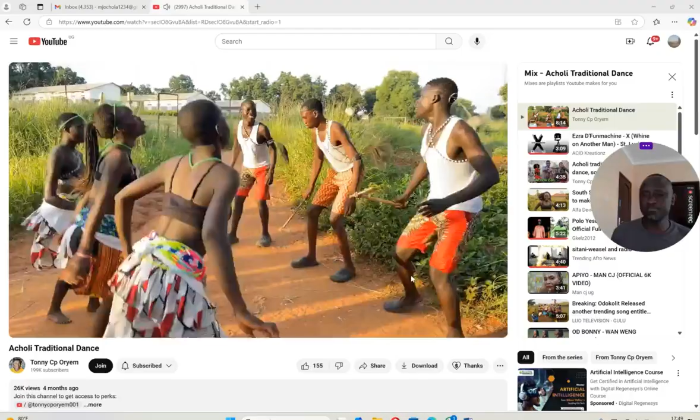Okay, that was anyway, culture is culture.

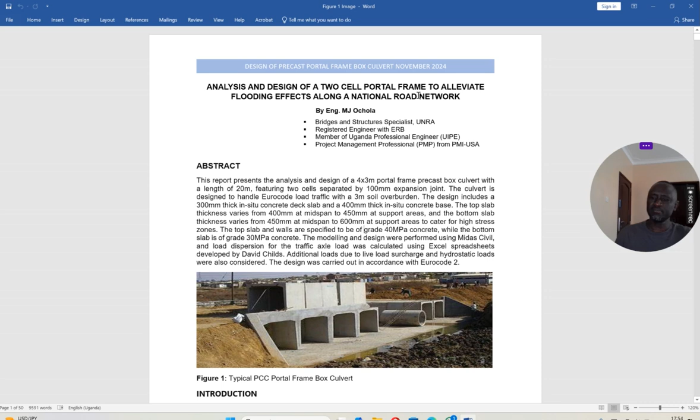You see at the bottom of the vertical walls, the forces are higher, and therefore they require a thicker base to absorb that punching shear, the shear stresses, and other things. So that's why you see this variation.

Now you'll see in the model, the top slab and the walls are specified to be grade 40, while the bottom slab is grade 30. It's cast in situ concrete.

The modeling and design were performed using Midas Civil, and load dispersion for the traffic load is also calculated using Excel spreadsheets developed by David Childs. Many of you who have access to most of this Excel know we have one prominent professor, David Childs, who develops quite a number of those spreadsheets that we always use to help us with design.

Additional loads due to live loads, surcharge, and hydrostatic loads were also developed. As you are aware, gentlemen and ladies, for culverts, it's a very simple loading that you need to understand.

Culvert with cushion or with overburden soil, you have two cases to consider. You have a case when the soil is dry, meaning you calculate the overburden stress, the vertical stress on the culvert, based on dry density. Then you work on the lateral pressure, soil pressure on the walls, based on the dry density. After that, you do the surcharge and hydrostatic separately.

Okay, hydrostatic comes in now. When we're dealing with hydrostatic, that's when the moist or saturated situation comes in, meaning you now have case 2. In case 2, the overburden soil now has a saturated density, and the density for the lateral soil pressure will also have the saturated density. So you need the two densities so you can compare and look at the worst case scenario, and also the issue of hydrostatic pressure comes in.

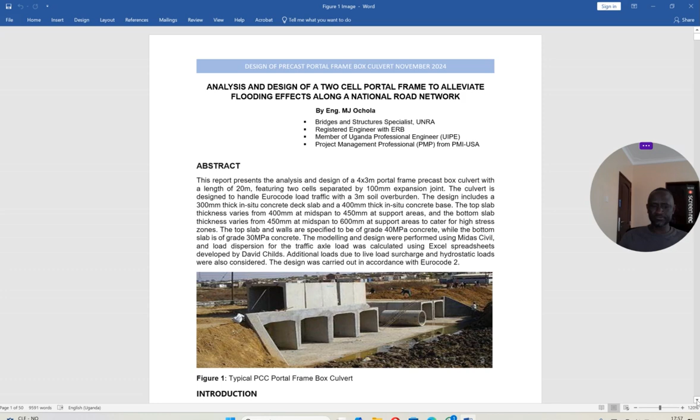So this is an internet portal frame that I put in here, but I'm going to modify this — I'll do an AutoCAD drawing and other things to beautify it more, and then compare the effect of when the fill is 0.5 meter versus when the fill is 3 meters. For now, we are dealing with 3 meter depth, but when I deal with a fill of 0.5, I will try to do a bit of adjustment, though more or less similar stuff.

The introduction here — basically, we are all aware box culverts are essential structures in civil engineering. They are used to channel water under roads, under railways, and other embankments, and in low-lying areas where we don't have proper channelized water. Where you have proper channels with well-defined river banks, it's difficult to use boxes, because that's where we begin to look at scour depth and turbulent flow, which becomes significant. Box culverts and other culverts basically deal with water that is more still, stagnant, and can flood from any direction, so they act as relieving structures.

So basically you find they are used in most swampy areas, low-lying areas, and the rest, but not well-defined rivers with turbulent flow, which require a bit more in-depth assessment.

This report details the design of a precast box culvert, considering structural requirements, material specification, and load impact. Whether it's precast depends on the contractor or the designer, and also the agency of implementation is very important.

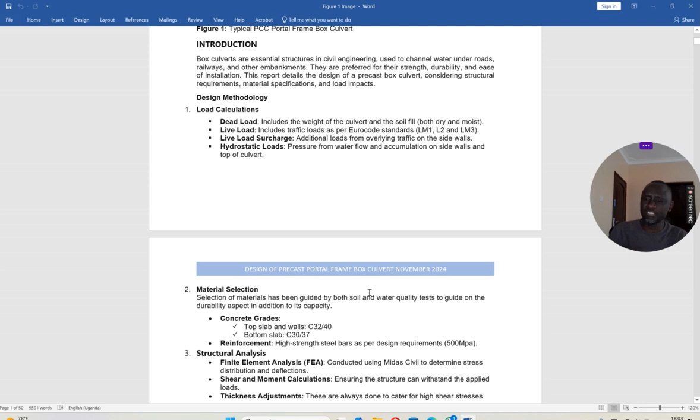Then the live load surcharge comes from traffic overlying on the side walls. Then hydrostatic loads, which are pressure from water flow and accumulation on the side walls and top of the culvert. That's why you have to look at two conditions: dry condition and saturated condition. Please don't forget this—it's very important when designing box culverts.

The rest is okay. Materials here—we already talked about material, concrete and reinforcement with all their grades given. So you have a class 40, then class 30. This is cylinder 32 and cube 40, cylinder 30 and cube 37. These are indicative; when you do mix design, you'll be able to get that. Reinforcement uses 500 MPa.

Then modeling—finite element analysis conducted using Midas software to determine stress distribution and deflection, shear and moment calculation, ensuring the structure can withstand applied loads. So basically, the output of your modeling and loading analysis gives you the shear forces, moment, axial loads, and other stresses. You're able to get that.

Now it's these outputs that you translate into the next stage of design. If you have to now use a tailor-made code of practice and other things, you can proceed, because you know the moment, you know the shear, you're able to get the shear reinforcement and the amount of reinforcement needed.

You first try, you do the required, you get to know the required area, then maybe it's not passing some of the limits or requirements, then you improve until you get the area that meets all the requirements. So at the analysis stage you get the value, which is then taken into the design stage. Since you're using Midas, there's another stage where you do the design, so we shall see how that is done.

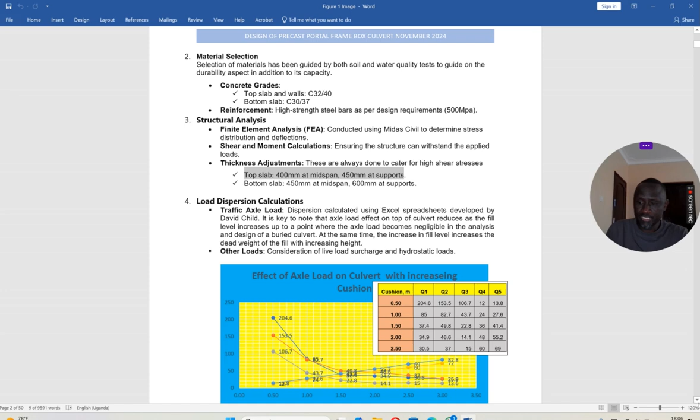Now the load dispersion calculation - here we have used David Child because it's now exceeding 1 meter. When you look at this table, I shared this before, you will find that this higher value here, the 204, the 153, the 106, coming down - these three are actually telling you that at the depth of 0.5, you have a very high value of dispersion force or pressure on top of the slab.

Then at 1 meter, it's dropping. As you go to 1.5, it's dropping further, up to about 3. At 3, it has actually dropped to only 26 from 200. So you see now there's a point where the traffic load becomes negligible.

But at the same time, if you see this rising member here, this is now the effect of the dead load. So as you increase the thickness of soil, you are increasing the dead weight and the effect. So the moment, the shear, soil pressure - everything starts increasing with the increase in

the overburden size. So at 0.5, you go to 1 meter, it's increasing, but the effect of the wheel load is also reducing at the same time. So there's a point where you find you don't need to consider traffic load in your design of box culvert once a certain depth of fill has been reached. So this is a very good table.

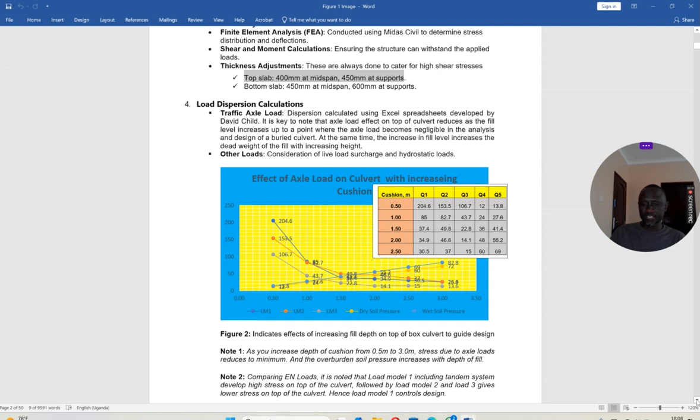Figure 2 indicates the effects of increasing fill depth on top of box culvert to guide the design. Note 1: as you increase the depth of cushion from 0.5 to 3 meters, stress due to axle load reduces to minimum, and the overburden soil pressure increases with depth of fill to maximum. So basically, you need to be aware of that.

So if you have a pipe culvert near your area and you find someone is trying to just cover the culvert temporarily so that people can cross, then resume work tomorrow - it's a very risky approach. By the time the road work is done, that is why sometimes at commissioning we find culverts have cracked, because you have exposed your culvert to traffic during construction in the name of allowing for diversion or quick access or crossing by the public, not knowing that when you have less fill, the weight of the truck goes directly onto your culvert, and if the culvert is not protected with concrete surround, definitely you're going to have a problem.

So sometimes you can see some contractors do a concrete surround. They will tell you, for us all this is okay, we are going to cut - you don't know why, because concrete is very good in compression. So when you do that, and you have a 0.3 to 0.5 fill, just temporary to allow traffic overnight or to resume work tomorrow, whatever truck is crossing your culvert will not damage it. But for some of us who just do the fill using soil and continue without inspecting, the culvert is already cracked.

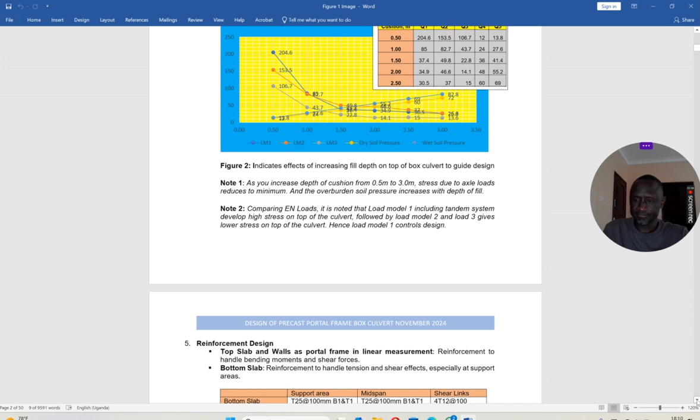Normally you say I'm using SV196, etc. Please try to check all and make sure even load model 1 is done, load model 2 is done, so that you are able to get the worst case scenario for your design.

Reinforcement design - this came from our analysis. We're not going to dwell too much on this. Top slab and walls act as a portal frame in linear measurement, with reinforcement to handle bending moments and shear force. This is the traditional way - we know concrete is weak in tension, so reinforcement is brought in to take on the stresses resulting from applied loads, the fill, and then the traffic.

So that is what you have here - the bottom slab, the top slab, the portal frame, the wall and the top slab, giving you the support area, the mid-span area, and then the shear links.

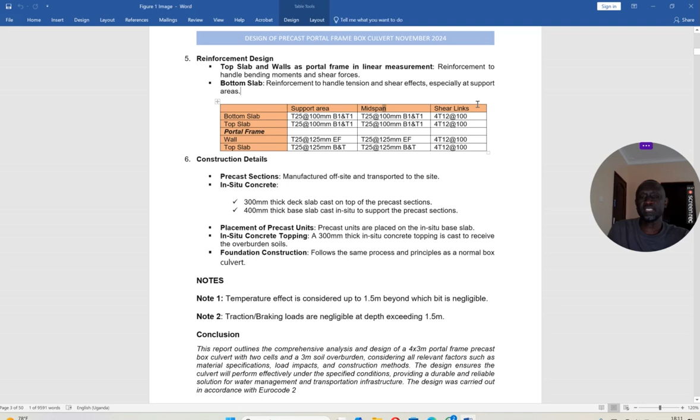Very interesting shear link - I want you guys to read a bit about shear links in the slabs and the rest. It's quite interesting, and we always struggle with young engineers on how you detail it. Look at the detailing pattern and try to see locally. You will go to the internet - I'm going to share more, not now - and you'll see there's a way you look at it, and what is the length where your shear links are required.

And then in between, what is required for normal sections. These shear links work everywhere - in slabs, in foundations, in big walls, and the rest of it. So it's always good to check.

For construction now, I may not waste too much time - I've already explained where you do your foundation. You prefabricate the portal frame in your yard, where you've prepared everything for steel formwork to give you a very good quality portal frame. Your precast sections are manufactured off-site and transported with a low bed, properly protected to avoid excessive vibrations that could create cracks. We don't need crack initiation at construction stage - cracks will only come from loading, which we normally take care of during design.

So these are the sizes. Then placement of the precast unit - they are placed on the in-situ base, so you must precisely and correctly construct your in-situ foundation to the required fall or grade. Be mindful that you have inlet and outlet - the inlet normally tends to be slightly higher. If it is 0, then we have a negative fall, maybe 20 millimeters down at the exit point or something, but it will be determined by the manuals for drainage and falls that are given.

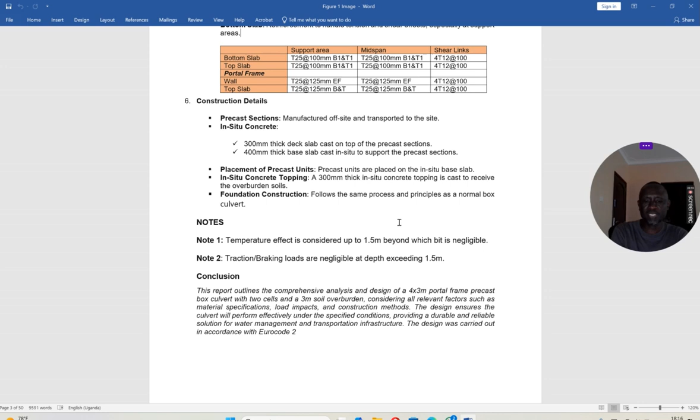In conclusion, this report outlines the comprehensive analysis and design of a 4x3 portal frame precast box culvert with 2 cells and a 3 meter soil overburden. Mark the keyword: portal frame, precast box culvert. A box culvert is a box culvert, but this time it's a portal frame, U-type, and precast. Think about prefabrication: the yard where fabrication happens, the steel mold, the processes required, and even the grade of concrete for prefabricated stuff tends to differ. Even the lifting effect may need additional reinforcement to take care of lifting, supposing there's an impact somewhere. So mark this: portal frame precast, 2 cells with a separation, and an overburden of 3 meters. Considering all relevant factors such as material specification, load impacts, and construction methods, the design ensures the culvert will perform effectively under the specified conditions, providing a durable and reliable solution for water management and transportation infrastructure. The design was carried out in accordance with Euro codes.

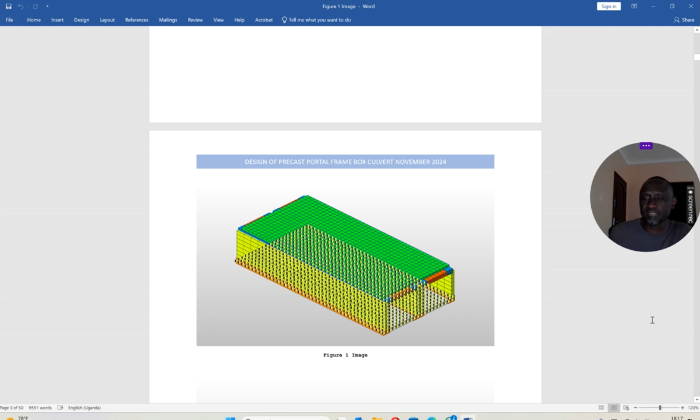Now we would have tapered this, but Midas does not design tapering sections. We raised that issue. I hope they will handle that.

This red part, this top, this green part here is now the in situ, but this one here is the portal frame. So this portal frame is 4 meters here and 3 meters here. This is a gap of 100. This will be filled up with some filling stuff that the contractor will consider, and then you load this structure, filling it up by around 3 meters.

You have effect on the sides. So there should be some shear keys, especially for these members, to avoid this. Remember, if you calculate the shear here, it can actually push this thing down. So this has to be rigid, this area has to be rigid, and this frame must be rigid from top to bottom to avoid being pushed by lateral soil pressure. How do you achieve that resistance? By introducing shear keys at the bottom. That should be able to help.

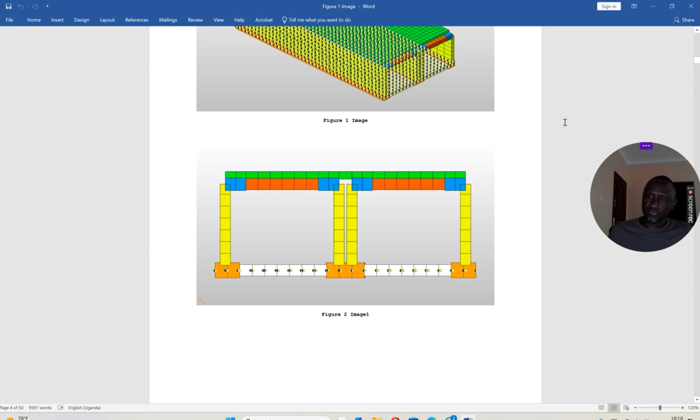So that is that, and this is a line diagram of the two portal frames, giving you two cells and the bottom in situ slab, simulating the soil pressure with the spring constant.

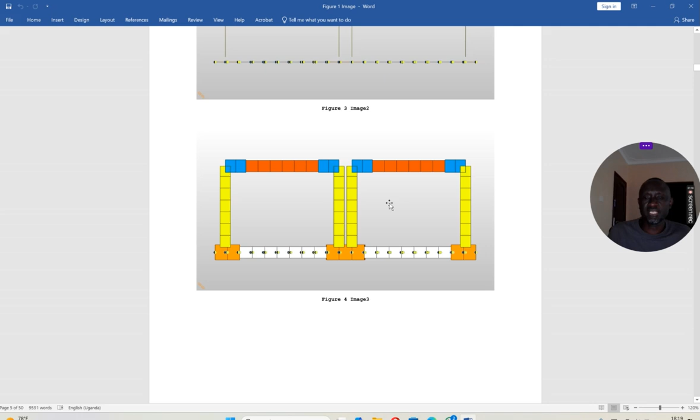And then here is the same model, but this one doesn't have any top slab, a 3D view. This is what we have, because the construction process is: you do this bottom slab, then you place this one, and later on you do this last one here, and then you will be done. Then the wing wall comes later. These are typical sections that we did.

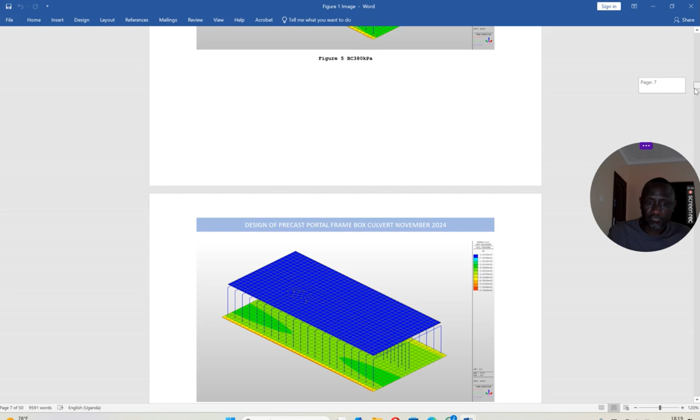This is now the model, the analytical model for plates, the bottom slab, the top, and then you have your normal portal frame, which I think somewhere you're going to see. You can see here, this is this one here, the normal portal frame. If you try to look, if you consider the opening as plates, then this will be deactivated kind of.

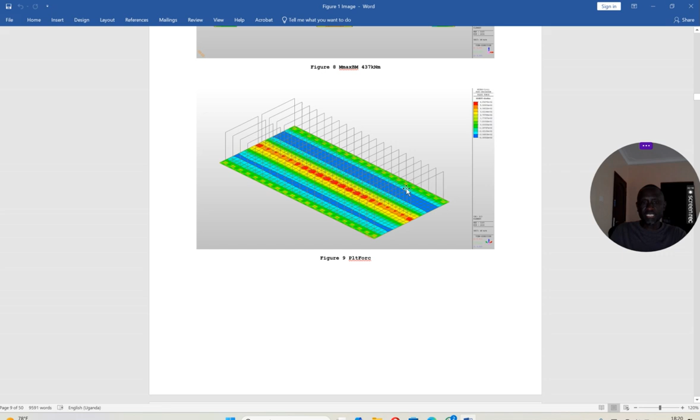You see like a line, because these are beams. So when you go and view the model as beam, you're able to see this, but you're not. This one goes into a bit which is not very clear, because it gets deactivated while the other is activated. So this is the model, and this is the output.

This is the shear, and this is the moment. You can see that all these moments are for 1 meter. If it was a normal plate where we have the walls all the way, you just have to cut a section to be able to see it. But now you can see this is the frame.

So the plate, which is the bottom, becomes deactivated kind of. You can see the pattern, and then this is a 2D view. You can see that where you have the portal frame resting on the in situ base slab, it is a pin support.

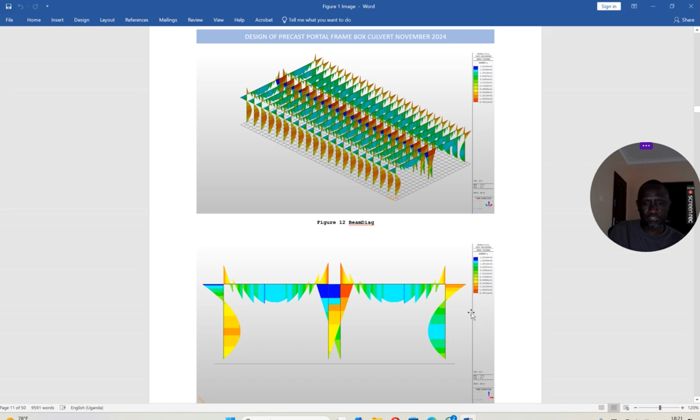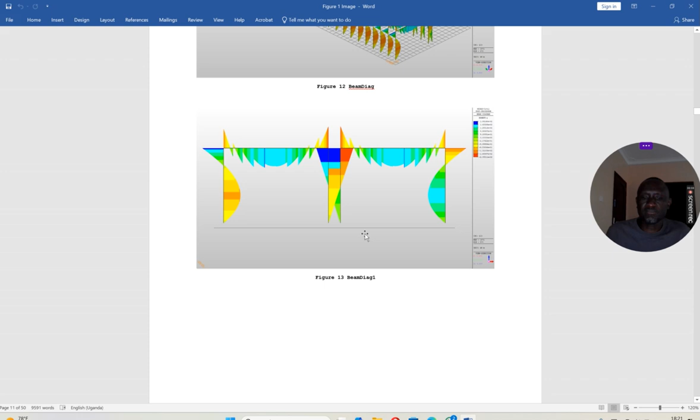You have to be careful when you are modeling this. You go to the beam releases. From the beam releases, you are able to set this aspect of pin support, pin to fix, and fix to pin. All these are fixed except this one, which is pin, and the rest will be fixed. Once you do that, you will not go wrong. It will give you that pattern the way you are seeing it, and you are good to go.

So this is shear, and this is axial load. This is now the axial load in 3D, and this is now the boundary condition. This boundary condition is what you need. At the bottom here, this is where you are giving this support so that it does not take up moment. That's where you have to go.

These are frames, these are portal frames, by the way, 1 meter. If you model it as walls, there's normally a bit of difficulty in putting in that frame and the boundary condition. But if you do it as a portal frame, you are good to go. You will have it well.

So now these are the rigid links up here, which connect things. We could have done this one as elastic. You can use an elastic link, but there it has to be defined as rigid, and it will still give you something similar to using rigid links. Down here, these are the support system, support condition, where you are connecting it, and also giving the definition that this last point is a pin point.

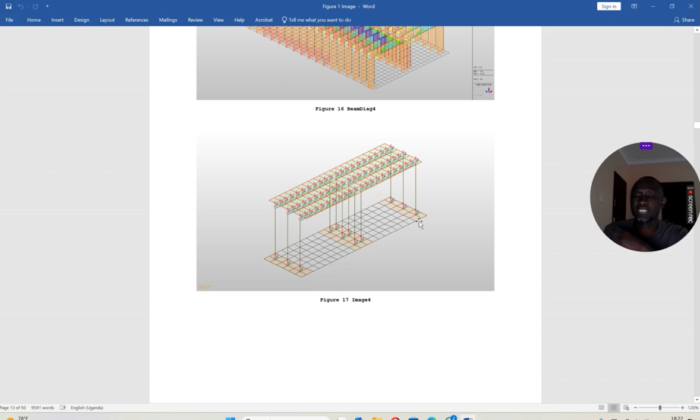What we have to do is connect the pin point together with the slab, so that it communicates and the loads are transferred, as you will see below. Yeah, so basically that is what we have.

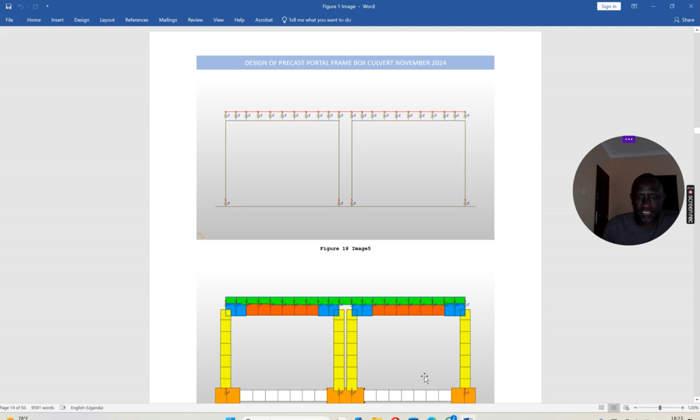So here is the thing. Here is your slab, the bottom slab. These are the elastic links, which are rigid links, connecting the in situ slab to the top here, so that there is a transfer of load in accordance with the way it acts in reality. Down here also you have the support, the links, but the last point has to be defined as pin. So this pin end, and then the next joint will be rigid, and that's how you see it down here in the 2D impression.

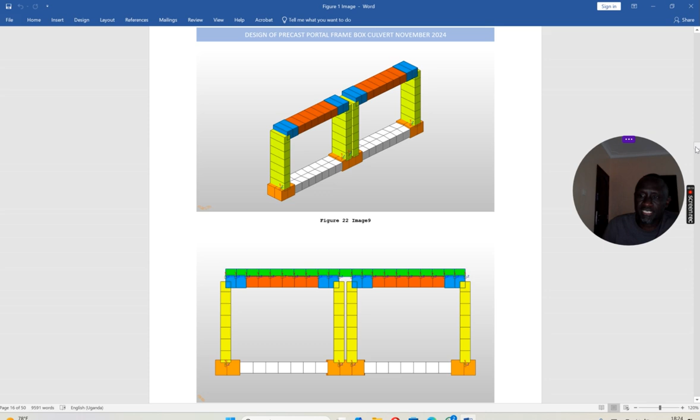So basically that is what you look at. What I forgot to do was to demonstrate the different loading, which I think I will do for the other one. So this is the 3D, this is now the portal frame as laid out. This one is one member made already. I've done this and used the average, because if you do tapering and indicate it here, it cannot design for you. I told you that Midas will design a basically rectangular member, not a tapering one.

So ladies and gentlemen, this is your modeling up to the last point. I've gone slightly down, but the outputs are here. These are the outputs. So from this output, once you are done with all this modeling, I told you that in Midas there is a component for design. You go to the design component, and you are able to do your specifications, the design code, the material grade, the limits, the stresses, crack width — all that you have to specify.

Once you have done all that, then you are able to run. But there are also procedures which I think we shall get time to demonstrate. In my previous session, I think there's somewhere we did something on design of box culvert, so it's not very far. Once you model it and give the right boundary conditions, it should not be a problem.

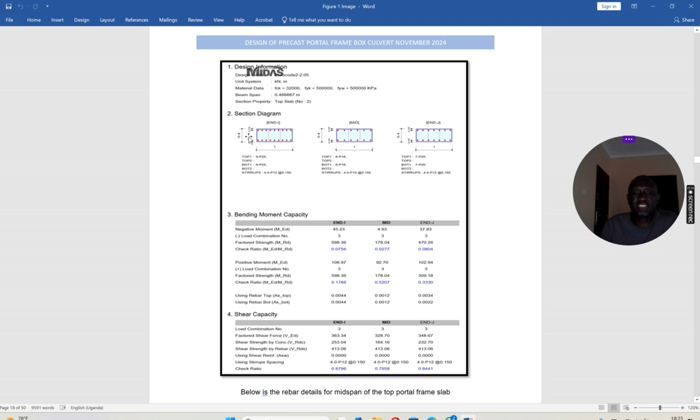So when you do your design, this is what comes out. You find these are the top portal frames. You see this one is near the support. I want you to take note: this one you see more reinforcement here, and less here, at mid-span. So that means the moment tends to be more at the support than at the mid-span.

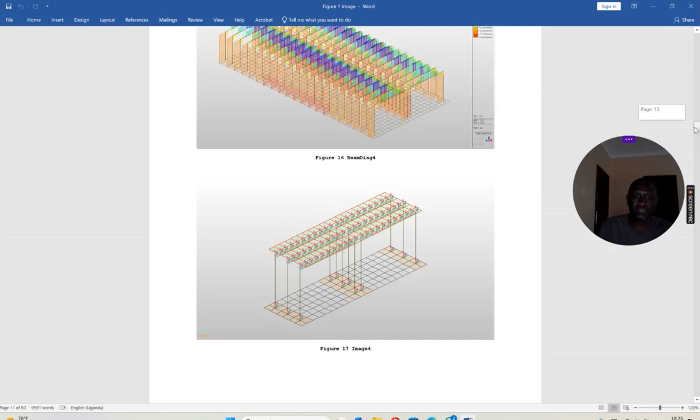I'm taking you back here. So if you look at this, the moment here tends to be less than the moment over the support. The rate value seems to be high, that's what I'm trying to say, that it tends to give you less. Then shear tends to be higher here, but reduces to zero at mid-span and increases again. So the shear links may not go all the way there. This distance you need to know so you're able to specify that.

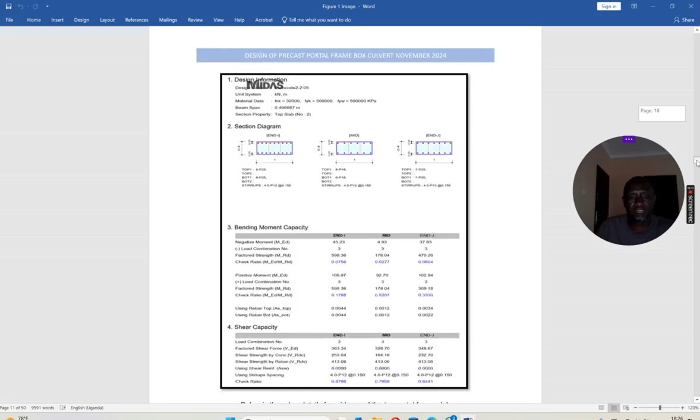Okay, so basically in the design report, this is what gives you all the details of the reinforcement you need. They're all captured here. At your free time, you can actually do that, try to view it, and appreciate it.

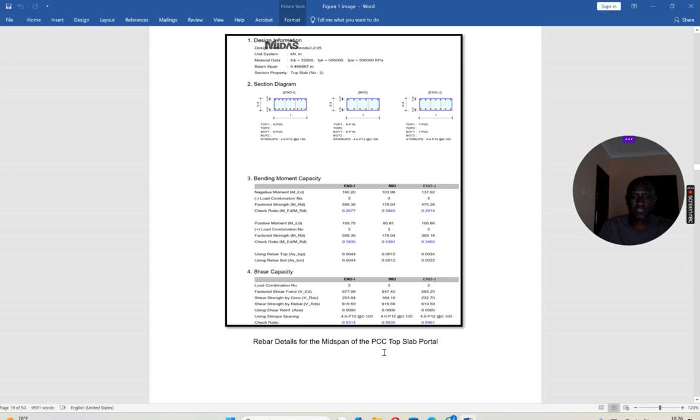Then these are all. Then there is for the vertical wall, then there is for the top slab, this is for the top slab portal frame, and then you're going to have for the bottom slab. And then you see this is like a column, so you can see the PM interaction diagram comes in. So you have a design, applied load, axial forces and moment resistance checks.

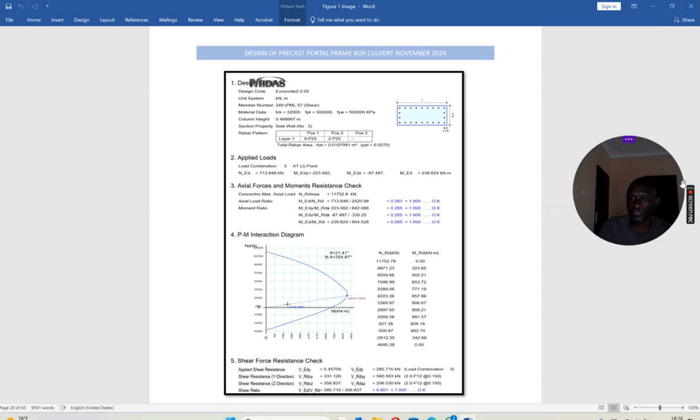So they go and look at the worst case, and the shear force resistance checks are also done here. All have passed. Now here, when you're modeling, you can remove these two middle bars, very easy to model, to remove it. We shall demonstrate sometime back and you get it.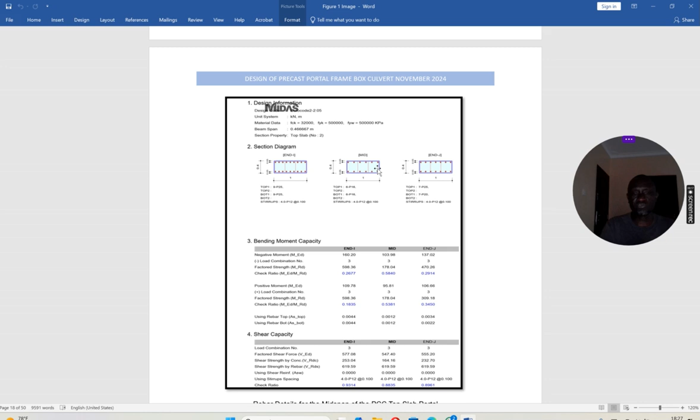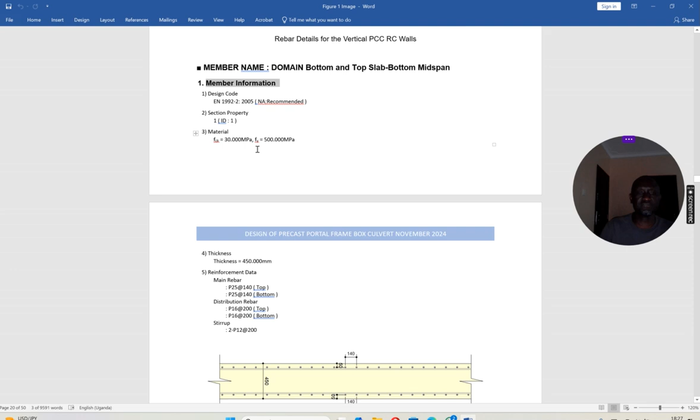Then when it came to this, this was for the summary. Normally for Midas, you can look at the summary to avoid going into detail output. There's detail output, then there is summary graphic. So here is graphic, I just decided to give you graphics for that. But now for the slab and the rest, they were giving detail, so with the detail member it gives you the domain, bottom and top slab, bottom mid-span, giving the member information, the Euro code, everything.

Then you come down to the reinforcement that has been input to design. The thickness is given, reinforcement data given, distribution bars given, stirrups also given. So you find it gives you everything, the spacing given here, the cover as you have specified, because you have to specify all the cover, everything.

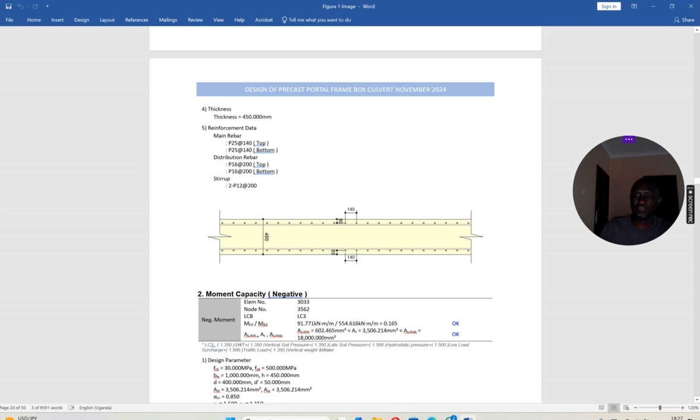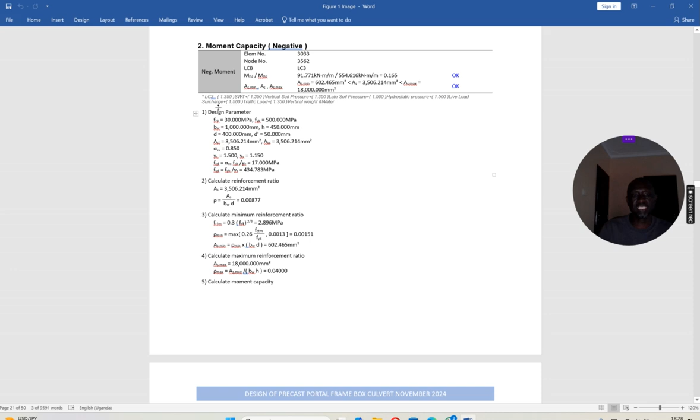So that gives you, and then now you start with moment checks, moment capacity check at the negative, this is now the one at the support. It gives you all the parameters, the design parameters all given here, and it tells you that actually your design, basing on the reinforcement you have specified, is okay. Then moment capacity for positive bending moment is also here, you look at it, it gives you the same thing, it has passed. So that means the reinforcement you have specified is okay.

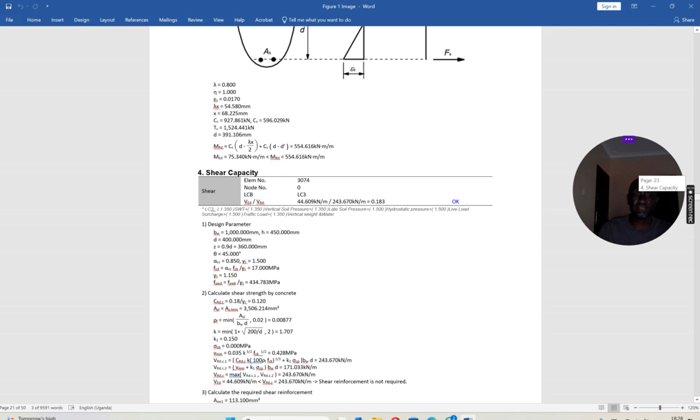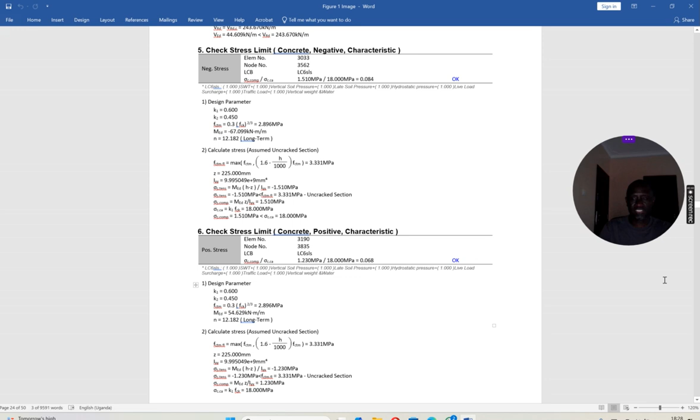You come down and check the shear capacity, you have to check and make sure it's okay. Even the stress, checking the stress limit, concrete, negative characteristics and the rest of it, it has to check for you the crack and the stress limit, and if there's any problem, then you are able to go back and modify. Even checking on crack limit, they're all given. So if it has all passed, that means you're able.

Look at the ratio. If the ratio is quite low, less than 0.5, that means maybe you can still adjust the reinforcement so that you can slide it up to around 0.75, because again if you go too low, it means you have over-designed.

So we have to strike a balance for value engineering and see how best we can handle that. This explains many things that happened there.

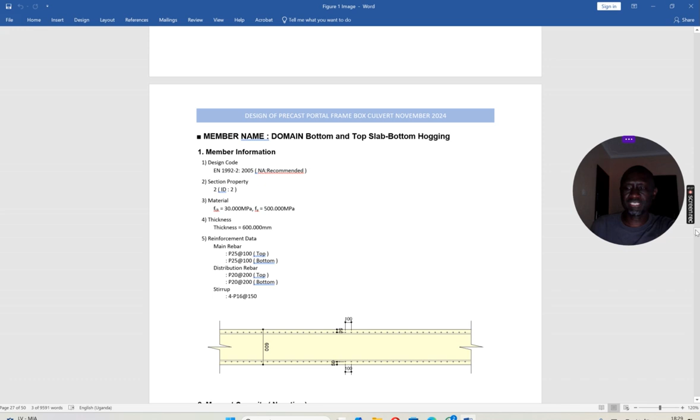You see now, this is the second one. The member name is domain, bottom and top slab, bottom hogging. It will explain for you and give you all the details. They are similar. You get this one, this is the bottom detail.

This is where the thickness has increased, to 600, because the 450 couldn't work. So now you can see from the model, it is 450 to 600. That's how you can see now. It has given you that one.

All these are designed from Kong and Evans, Mosley, and other codes of practice and literature. I think they follow this procedure, and you're able to get all that. So all these members are all designed.

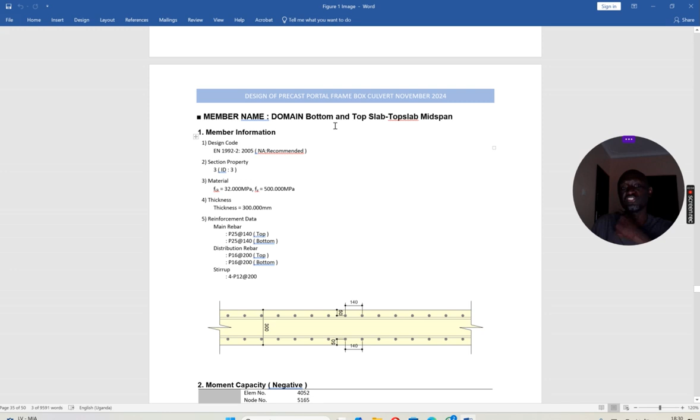See now, this one is giving you mid span of top slab, which is about 300. Now this one is doing the in situ one, designing for us the in situ. It has given you all that, and they're saying it has passed, but I believe I need to check the in situ again. These bars could be more. We need to reduce the amount of bars for the in situ, not the portal frame.

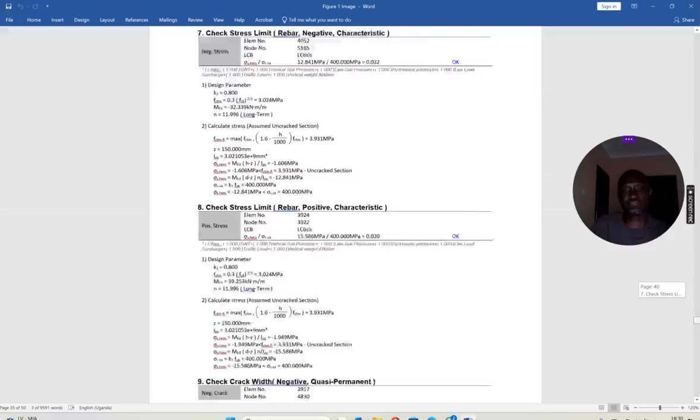So every member you have specified will all be calculated for you. Your work is to organize it and pass it on to your CAD engineers to do the detailing. Once you have done your detailing, you do your takeoff, prepare everything, and check that.

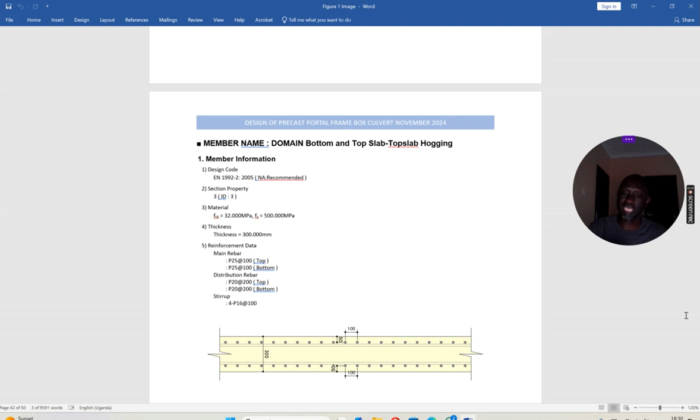Also remember, all the design must be quality assured by another senior person or someone equally expert like you, to check, because sometimes we make mistakes, you easily forget something like factor of safety or the loading. So you get that. Basically, this is now the output.

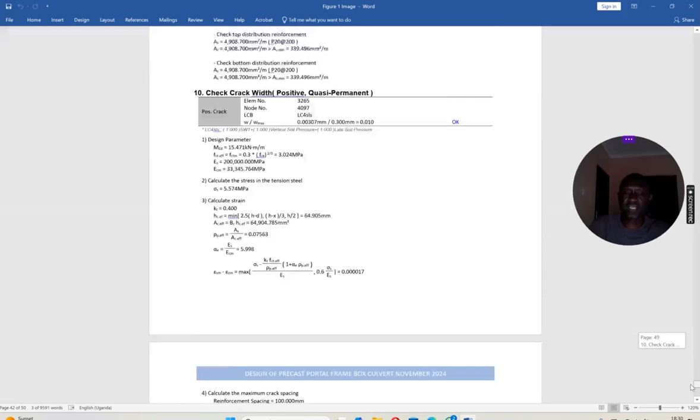The most difficult part is the modeling. From modeling, then you come to...

Loading. Once you get the loading ready, I told you for box culvert, be mindful of loading in two conditions, wet conditions and dry conditions. Consider all that as different cases. You will get the worst case scenario and you are able to get it right. So I think that is that.

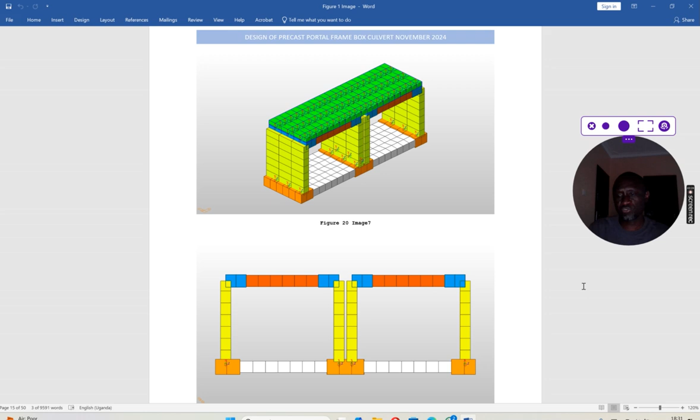So portal frame is a bit interesting. We shall share more. Next time I will explain the 0.5 meter cushion. I think I will explain, not just the output, but the Midas, how I've done it, so that you are able to do it.

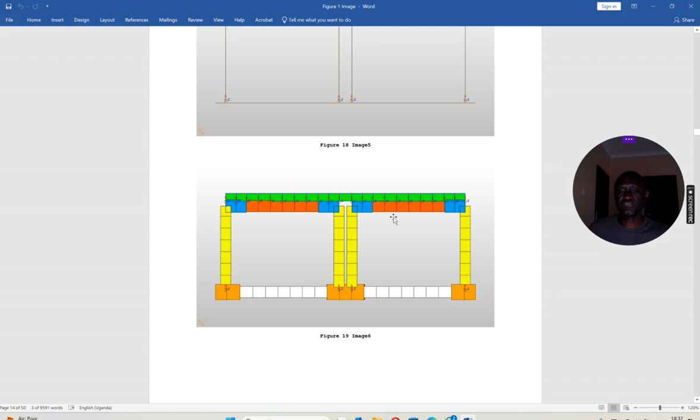Remember please that we can also do construction staging for this. It's a very interesting candidate for construction staging. You will do your bottom slab as construction stage 1, then you do portal frame, then boundary conditions, then the top slab, and after that you give it 10,000 days, after which you can now apply loading. I think we shall also try to do that, but that is how you can handle it.

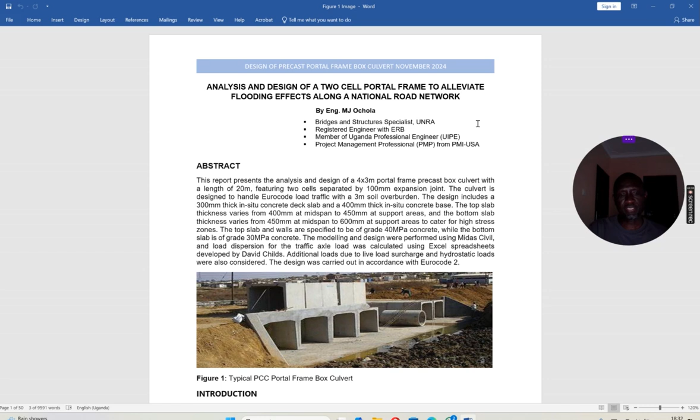Fortunately, I have to declare here that from the time I started to date, I think I have over 15 young engineers who are following me. One came, I think, on Wednesday to our head office from Ministry of Works, and she said, I got your contact from YouTube. Immediately I called her. I said, come, and I took her through. They had given her to design a 20-meter span bridge from somewhere in northwestern Uganda, in West Nile.

So I explained to her, once your boss has said you do a design of a culvert or a bridge, you now go back as a designer. You are almost a team leader, a coordinator. You start to look at the processes required. You don't jump to start opening Midas, that comes at the tail end. You need to look at the data to be collected, the team to collect the data, the sequencing, everything.